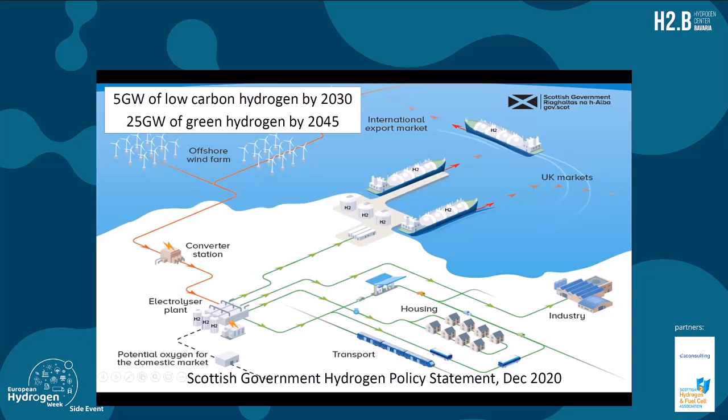So the policy background was set by the Scottish Government in December 2020, slightly later than the German hydrogen strategy, which came out, I believe, in June 2020. But it also has some very strong ambitions around the production capacity for green hydrogen: 5 gigawatts by 2030, scaling up to 25 gigawatts by 2045.

The big driver behind this all will be renewables, the capacity for production of renewables in Scotland. As people say quite often, Scotland has plenty of wind and plenty of rain, so we have a great wind and hydro resource. We do get some sunshine, and that will be playing a part in the future as well. But we believe that wind will be the dominant form of renewable generation in Scotland through to the 2040s.

Much of this will be offshore wind. We already have about 9 gigawatts of onshore wind, about 1 gigawatt of offshore. By 2030, we expect to see more than a doubling of onshore wind, and probably about an extra 11 to 12 gigawatts of offshore wind.

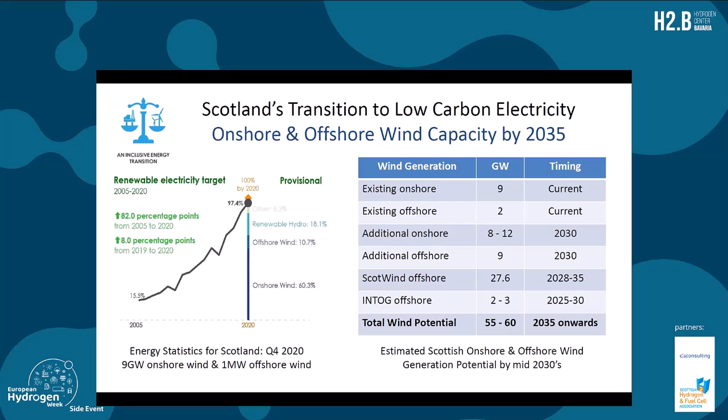And then starting to see some very substantial growth with the activities called ScotWind. You may hear this mentioned a few times during the event today. The Scottish Government is leasing areas of the seabed around Scotland, and the round that was completed this year identified 28 gigawatts of leases signed off for development of offshore wind.

Many of these projects are now looking at also using this renewable energy capacity for green hydrogen production, possibly for making ammonia or methanol or other similar power-to-X products.

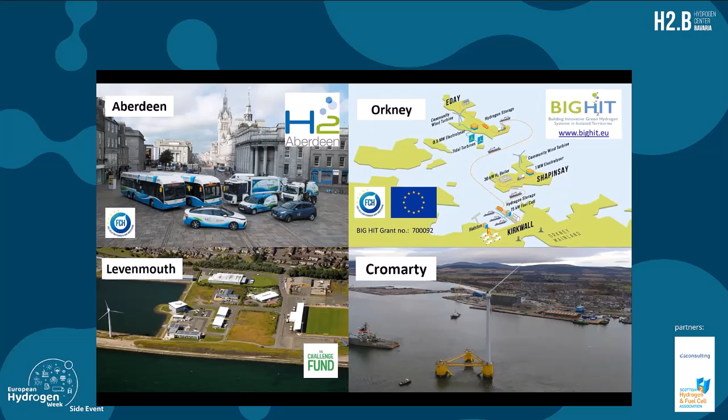That's coming through, but what I'd like to mention very quickly is some of the activities happening around Scotland already. So I'm going to take you on a quick tour around Scotland, starting just north of Edinburgh in a town called Methil, just across the river from Edinburgh, then move up to Aberdeen, Cromarty and Orkney, just to find out what's been happening.

In Methil, the picture you see here on the right, you can see that this is right by the sea. There is a big dock. That dock used to export coal. Methil was a big coal producing site. No more—that finished probably 30, 40 years ago.

Now the main activities around Methil are to do with, for example, the hydrogen office, which is the building, the triangular bit, the diagonal building you can see in the middle here, next to the dock, and also the links into renewable energy, for example, with wind and solar. Together, this has actually helped to develop a good understanding of the opportunity. Also, a lot of outreach in Methil with schools and colleges and the local population. And the picture you can see on the left here, there is now a large offshore wind turbine, just offshore.

It's about 100 meters from the shoreline, and this will be used to power an electrolyzer to produce green hydrogen. The hydrogen is going to go to about 300 households in the local area instead of using natural gas.

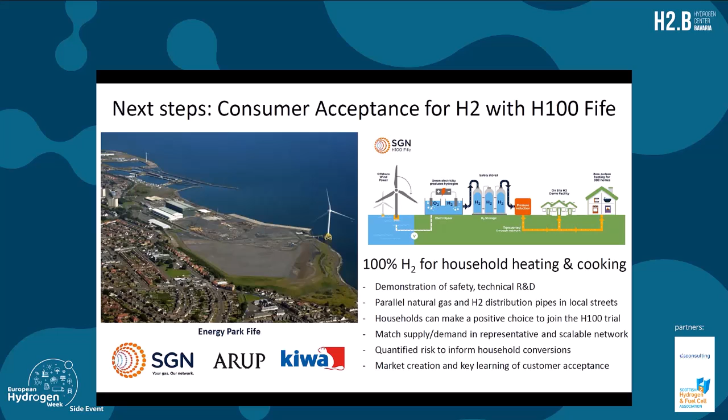So this is an opt-in trial. The householders will have a choice between natural gas or hydrogen. This is an important trial, both for building up the use of hydrogen for heat, but also stimulating some of the early demand for hydrogen. Within a couple of years, hopefully we'll be able to give you some updates around the experience for the households, the use of the hydrogen in domestic heating and cooking.

Moving slightly north, about 100 kilometres north of Methil, on the east coast of Scotland, Aberdeen used to be known as the oil and gas capital of UK, Europe, a big hub for oil and gas exploration, production and technical support, but now very much looking at energy transition.

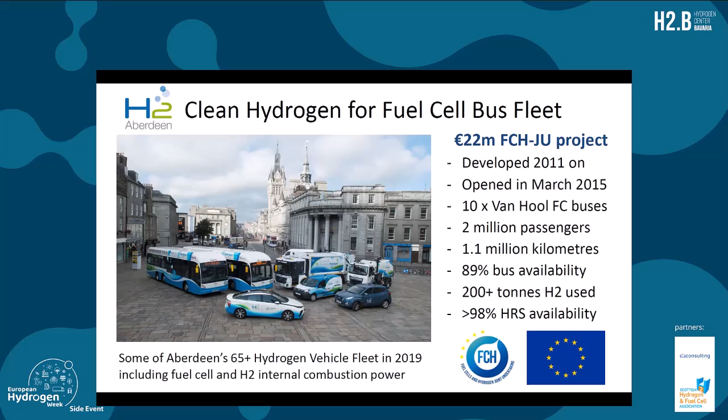One of the main activities that Aberdeen has been leading is around the deployment of hydrogen fuel cell buses in the city fleet, and again this is a European funded project. This has been supported by the Clean Hydrogen Partnership, opened in 2015 with 10 single-decker buses. It's carried over 2 million passengers. We now have a fleet of 15 double-decker buses running around Aberdeen, and it's been a great success in terms of the reliability of the refueling.

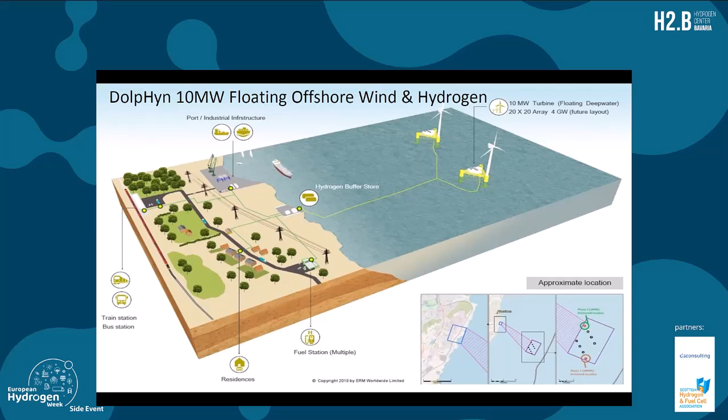This is important for deploying offshore wind into the deeper areas around Scotland, further away from the shore, where the cost of the pipelines could be much more approachable than the cost of doing it by direct electrification. And indeed, the bigger picture of the North Sea - there is a lot of experience and infrastructure from the oil and gas sector, pipelines, experience with working offshore, that will be important for the scaling up of green hydrogen using offshore wind.

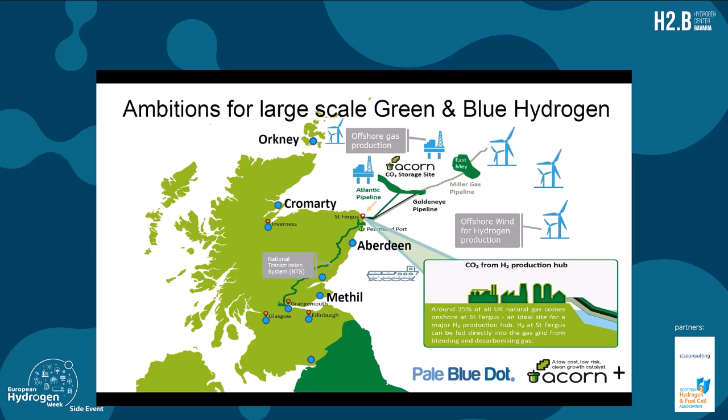On this map, you can just see, just up the coast from Aberdeen, a site called Cromarty, and that's our next stop to see what's happening with the development of green energy port hubs. You'll hear a lot more about this from our speakers later on, Joanne Alday of Port of Cromarty Firth, and Tim Dumenil of Storegga. So I won't spend too long on this one, just to say that Cromarty came onto our radar very recently, in 2020.

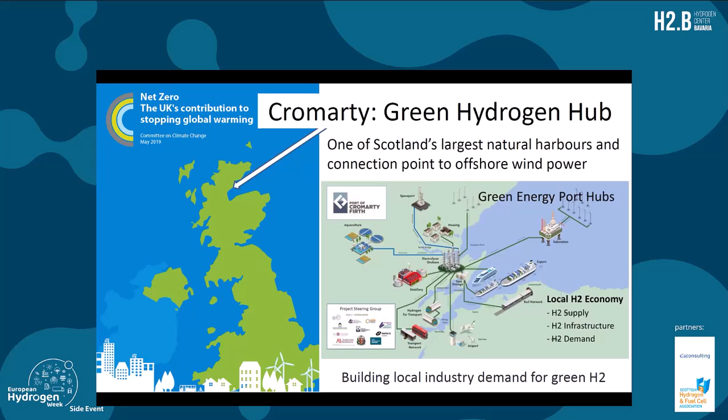This started to be looked at seriously by the Port of Cromarty Firth. A year later, they were actually signing agreements with Scottish Power for launching the North of Scotland Hydrogen Hub and electrolyzer capacity at Cromarty. The development of the concept for the green energy port hubs is bringing together the production, the demand, and the infrastructure that you can use to move the hydrogen around - some of it moving potentially down to Inverness, the city of Inverness about 30 kilometres away, and also the port for export into wider markets, including Europe.

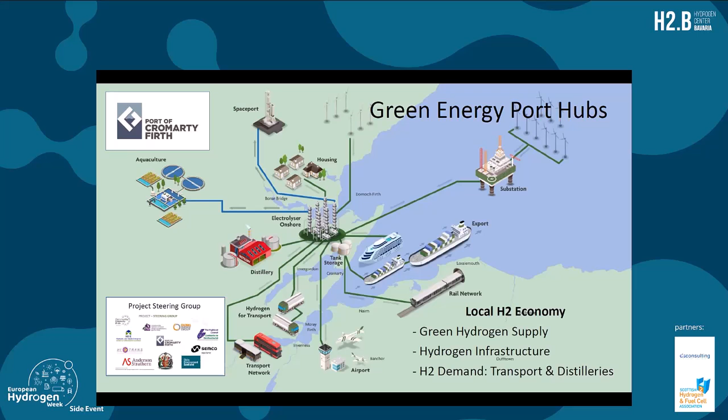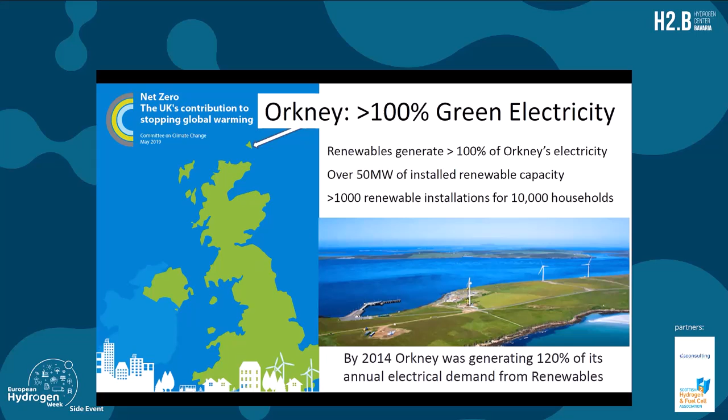Now moving up to Orkney, the Orkney Islands just off the northern tip of Scotland, about 25,000 people, very much at the leading edge of deploying renewables. By 2014, they're actually producing more renewable electricity on an annual basis than they were consuming. So very much a leading location. But that brought its challenges around the capacity and the constraints of putting more wind onto the electricity networks.

Again, with European support, there's been a number of projects taking part in Orkney. One of the projects that the Scottish Hydrogen and Fuel Cell Association was involved with was Big Hit. That started in 2016, and concluded earlier this year. That was about establishing hydrogen production on islands in Orkney, which can be used to take surplus renewable electricity, convert it to hydrogen, and then store it and transport it to other locations for different uses.

This has actually allowed us to get a lot of experience about production of hydrogen from renewables, and it's not always straightforward. You have to match the capacity of the electrolyzer with the availability of renewables very carefully, but also with moving it and using it between islands.

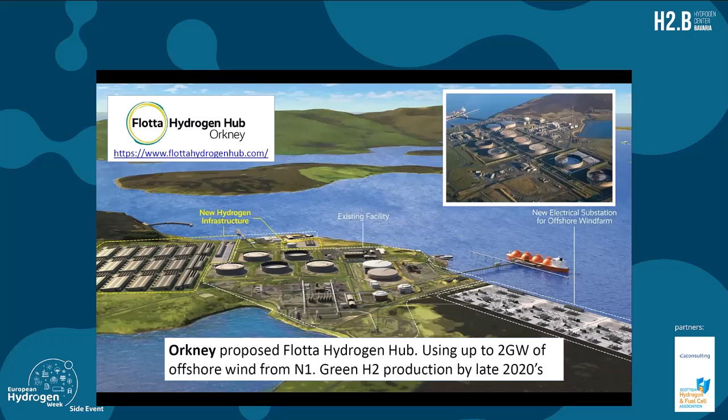Well, if we look at what's going to happen next in Orkney, as part of the ScotWind bids, there's actually a large bid in for areas to the east and west of Orkney, multiple gigawatts of wind capacity. And in Orkney, there is actually a location currently used for oil and gas, mainly oil, which could be repurposed to being a hydrogen or power-to-X hub for Orkney. So this is about not just looking at the small projects, but actually seeing them as a stepping stone towards much larger deployments. Orkney and Shetland are two locations.

The Western Isles could be very similar. So these are potentially, rather than having energy islands being created, we have islands already which are in good locations and can be repurposed from oil and gas to green energy, clean energy hubs for the future.

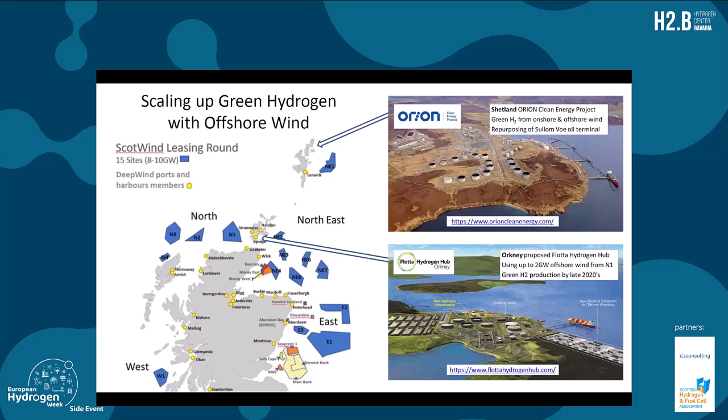And that matters because we can then see a pathway going forward towards starting to export that surplus capacity of energy, either as hydrogen or methanol or ammonia, into adjacent markets.

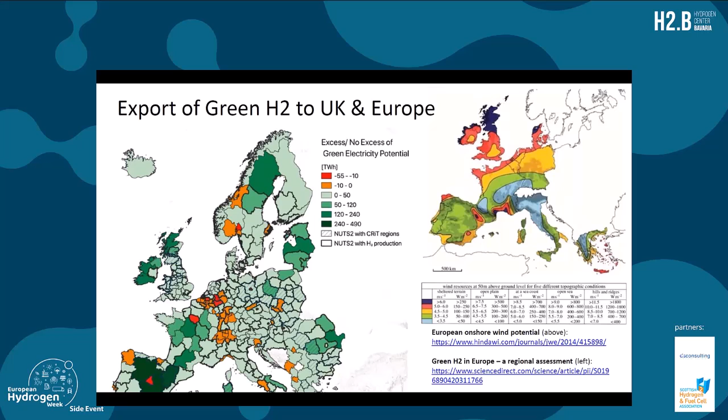So this picture shows very clearly the potential of renewable energy production across Europe. The areas that have a surplus are in green. The ones that are in deficit are shown in red or orange. And going forward, this can actually help us to supply the markets in Europe, adjacent markets where there is a demand for hydrogen and clean energy.

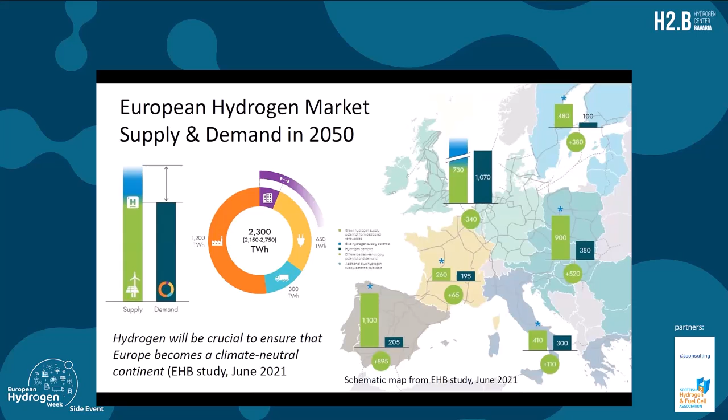This could be by shipping, or potentially going forward, it could be by pipeline. So pipelines connecting together different locations around Europe could then start to become a hydrogen backbone that allows us to move that energy efficiently and at the lowest possible cost between different locations at large scale.

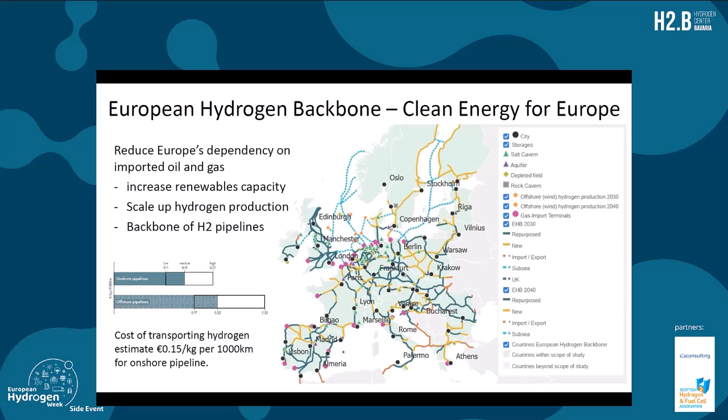So just to summarize, Scotland's got the targets for building up. We have the potential to start to actually produce. And this webinar is a good example of how we can then start to link together the activities between Scotland and Bavaria and start to make things happen on a practical level.

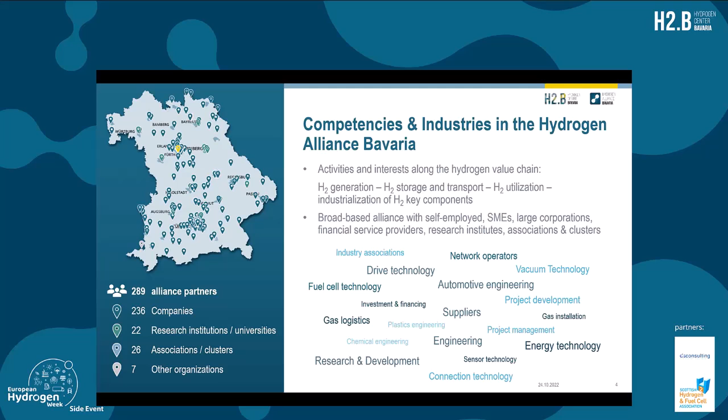Next, I would like to give you a short overview of the Bavarian hydrogen strategy and the strategy process. The strategy process started in May 2020 with the publication of our position paper. This was developed by the H2B and the Hydrogen Alliance, and this paper also served as a basis for the Bavarian hydrogen strategy, which was published at the same time.

At the end of April this year, we presented our Hydrogen Roadmap Bavaria, which outlines the next steps to ramp up the Bavarian hydrogen economy. I'd like to give you a bit more details regarding the content of the Bavarian hydrogen strategy and the Bavarian roadmap.

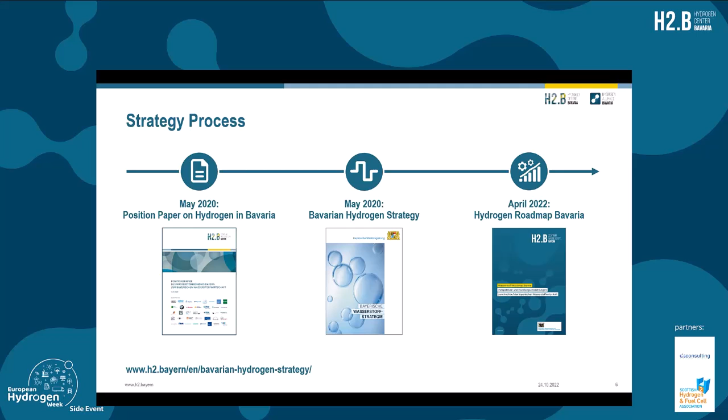The hydrogen strategy was published by the Bavarian Ministry of Economic Affairs, Regional Development and Energy, and puts a strong focus on green hydrogen and its use in mobility.

Since Bavaria has only limited resources or limited potential for renewable energy and the production of green hydrogen, at least when we compare it to other regions and countries in the world, the strategy supports hydrogen imports from other countries to Bavaria and technology exports from Bavaria.

For this purpose, various implementation steps have been defined. The most important or most interesting one might be the funding program for hydrogen refueling stations in order to promote hydrogen applications in transport. Another implementation step consists of the Hydrogen Roadmap Bavaria.

Here the goal was to define concrete milestones on the way to a hydrogen economy and to show perspectives and recommendations for action. Furthermore, the roadmap aims to estimate the possible hydrogen demand for the next few years.

It is important to note that the war in Ukraine and the energy policy consequences have not been included in the paper, as the writing had already been completed at that time. So the demand forecast that we made really should be seen as a minimum, and we expect an increasing importance of hydrogen imports in the medium term.

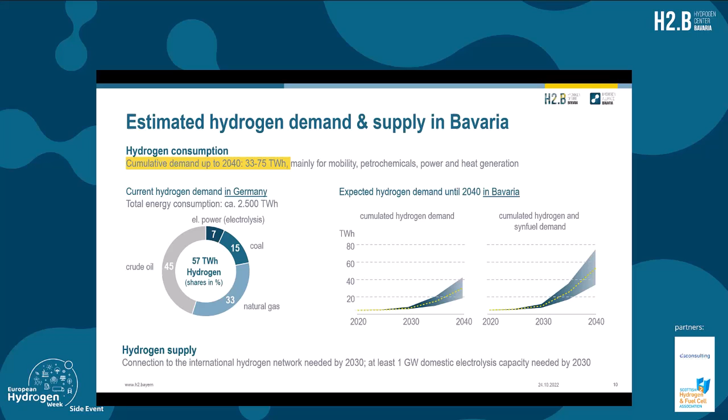As you're all familiar with, there are different forms available of hydrogen. Hydrogen could either be in a liquid state, in a gaseous state, chemically bound, or we could use derivatives. And depending on the form, there are different transport methods applicable.

For Germany, we seek to get early access to the European hydrogen backbone. Currently, there are 5 possible import corridors that are really important to us. Regarding Scotland and Bavaria, the North Sea corridor is the most important one. In order to ramp up the projects between Bavaria and Scotland, we have organized this event to give you an insight on the 2 markets and the current activities.

You've heard quite a lot about Scotland, and just to summarise, you see the map on the left. That is a combination of the onshore hydrogen hubs that have been identified as potential hubs by the Scottish Government. And you see, as you've already seen, the offshore wind potential. So the point I'm making here is the Scot2Ger project, a simple proposition about the export of green hydrogen produced from onshore wind prior to 2030 to Germany, to be followed up by production of green hydrogen from offshore wind.

Fundamentally, before 2030, we expect to have 20 gigawatts of onshore wind installed, with quite a piece of that available for hydrogen production. Then we have offshore wind following 2030 with a likely installed capacity of around 40 gigawatts, and maybe half of that, perhaps more, available for hydrogen production, meeting local demand, and also for export.

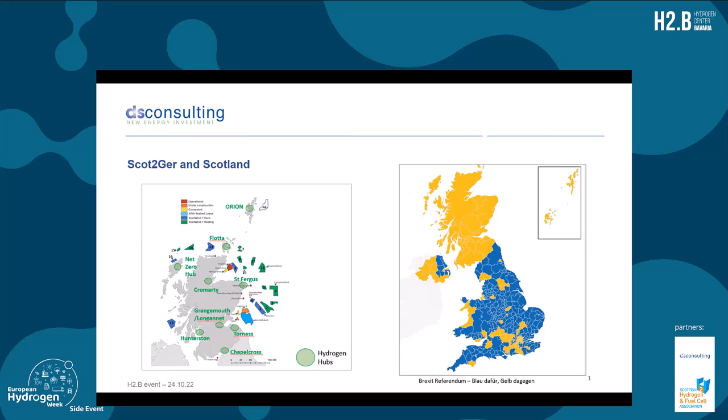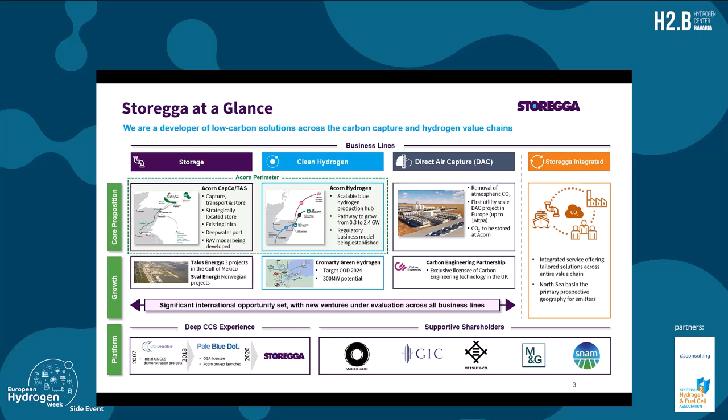And finally, we have Storegga Integrated, which is a full chain carbon management service to help large emitters find routes to sequestration. Storegga and our Acorn partners are leading the Scottish Industrial Decarbonisation Programme, which aims to capture and sequester a quarter of Scotland's carbon emissions by 2030.

So first of all, we need to understand a little bit about some of those carbon emissions. Prior to joining Pale Blue Dot, now Storegga, I was a senior manager with Diageo and heavily involved in energy minimisation and carbon neutral activity within the Scotch whisky sector. Whilst the Scottish whisky sector is a relatively small percentage of overall Scottish energy demand, it does, within certain regions, such as Cromarty, represent the majority of the fossil fuel demand within that local region through their fuel usage for steam generation and heavy goods vehicle logistics, as outlined in this pathway to net zero produced by the Scotch Whisky Association by Ricardo.

And as outlined within this pathway to net zero, hydrogen forms a significant percentage of the sector's transition plans. Energy efficiency through process improvement and the integration of electrical high temperature heat pumps, so industrial heat pumps, will reduce the amount of primary energy that is needed by the sector going forward, and therefore reduce the fuel switching requirements from electrification, bioenergy, and hydrogen.

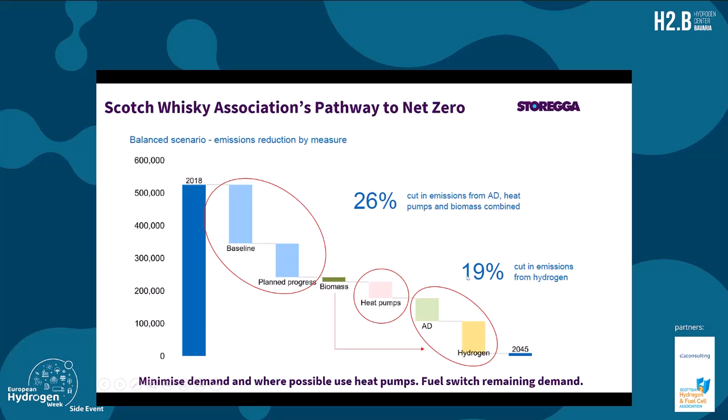Whilst it could be assumed that most industrial heat demand could follow a similar waterfall, this is unlikely to be the case given the inability to secure the very large electrical connections needed to replace industrial steam boiler capacity, the lack of waste heat recovery opportunity equivalent to the distillery condensers output, and the lack of suitable co-product for anaerobic digestion. So in some regions, we'll see hydrogen forming a larger part of that industrial demand. Storegga has provided input into that Scotch Whisky Association pathway to net zero, as the team have been supporting energy transition for the brewing and distilling sector for nearly 10 years.

So we've delivered a number of energy minimization projects and activities for the sector. We created a concept called Green Stills, which was an innovation looking to integrate both into new build and retrofit into existing distilleries high temperature heat pumps to reduce the primary energy usage of distilling by about 50 to 60%.

And we've led and created both the Acorn hydrogen projects and Cromarty hydrogen projects, which form part of the North of Scotland hydrogen programme. The latter will enable the distillers and others to secure security of supply for the hydrogen that they're looking to drive their industrial process with going forward.

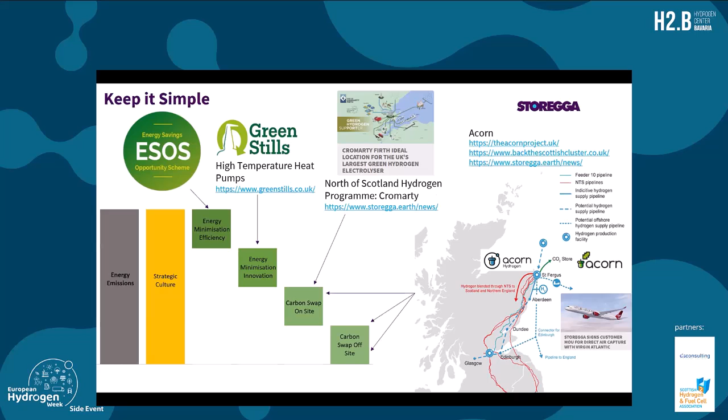So Cromarty hydrogen. In early 2020, Storegga started Cromarty Hydrogen, and in the first half of 2021, we delivered the feasibility study involving Scottish Power and the Port of Cromarty Firth. And in that feasibility study, we created a 4-phase vision for a build out starting at somewhere between 25 and 50 megawatts and building out to a regional solution of about 300 megawatts of electrolysis.

Scottish Power and Storegga are jointly now developing phase 1. We've done quite a bit of work over the last 12 months, and we're now looking at about 30 megawatts of electrolysis for phase 1. It'll be at Scottish Power's Beinn Tharsuinn onshore wind farm. Together we've customer memorandums of understanding in place with several off-takers, mainly distillers, for that project. The project seeks to take its final investment decision in August next year, and to commence operation in mid to late 2025.

With all of our hydrogen produced directly retailed to the end users and distributed by tube trailers to enable either a blend of hydrogen into the end user sites, or in several cases enabling the end user to switch to 100% hydrogen from their existing fossil fuel usage.

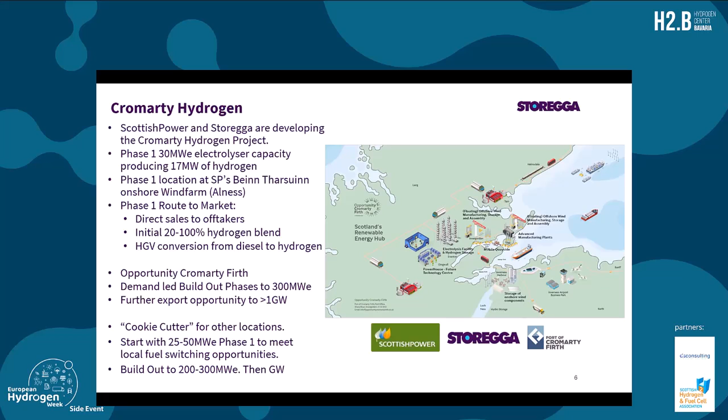The important piece about this is that you have to start with the right-sized phase 1 project, establish that foundational module of hydrogen, and then use that to build out this sort of regional hydrogen hub. A key piece of that regional hydrogen hub is then looking at the infrastructure to distribute the hydrogen.

So a couple of quick points on the route to market. At the moment within the UK, there is a gas safety management regulation that currently does not enable hydrogen to be moved within the existing natural gas pipeline network.

There's a cross-party working group that have been working on this for several years now, looking to make a decision by the end of 2023 about enabling a 20% blend of hydrogen into the gas network. But it'll then need a heat policy to come into place in about 2026 before any wide-scale adoption of gas blending or hydrogen blending into the gas network can come into place.

So for Cromarty Hydrogen, the phase 1 and phase 2 of the project, the route to market is going to be tube trailer. Whilst it's more efficient and cost effective to distribute via pipeline, the current regulation and policy doesn't enable that, and hence the initial route to market is through low emission fueled tube trailers delivering compressed hydrogen into the customer sites.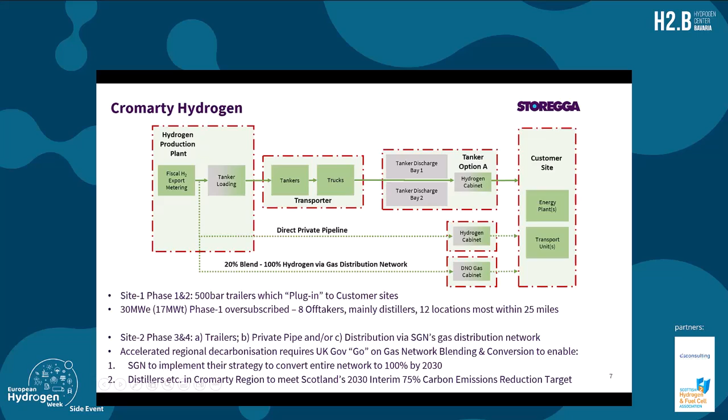We have to then look at this from an end user perspective, from the industrial customer, and this is how Cromarty Hydrogen started. We were having various conversations and discussions with the distillers, with the distilling sector across the north of Scotland, talking to them about the energy trilemma and energy transition.

So this energy trilemma is the security of supply, the cost, and carbon emissions. And so, what is the value proposition for hydrogen for industrial use?

When we've spoken to customers specific to this energy trilemma, their sustainability director will say, well, I need to meet my net zero target for my ESG reporting. Whereas the procurement director will say, well, I need the lowest energy cost to underpin my industrial operation going forward, whether that's for feedstock, heavy heat, or heavy transport requirements. But also that procurement director is going to be focused on the predictability and security of energy cost, which we've really seen play out in the international domain just in the past 6 months in terms of energy security and cost security around natural gas in particular.

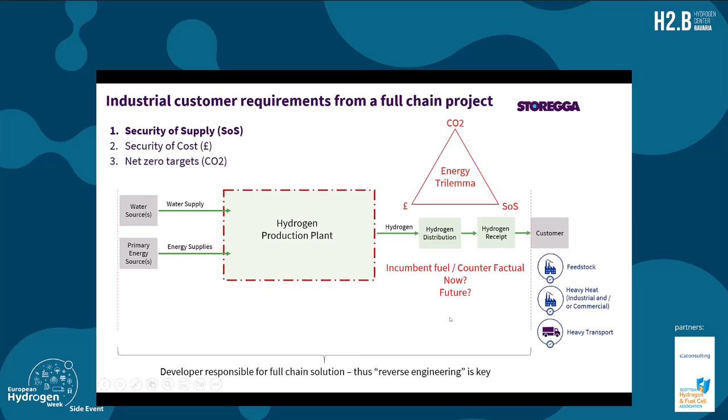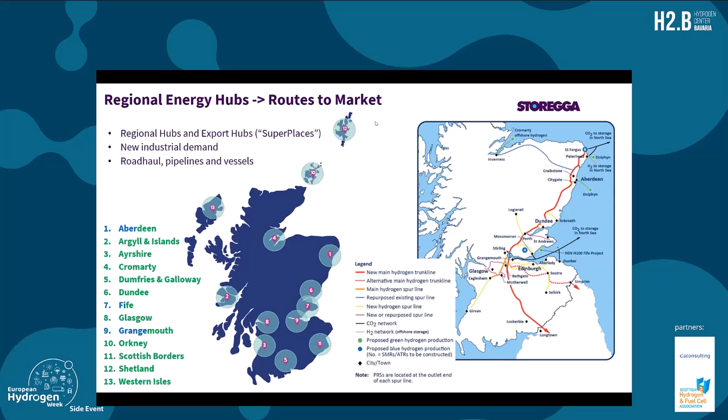Thanks, Tim. I will just share my screen. Guten Tag, everyone, I hope you're having a good day. I'm honoured to be here to talk to you today. I have a particular love for Germany and have spent time in both Bayern and Baden-Württemberg and really enjoyed being in both. So, as I say, delighted to be with you today and happy to talk you through our hydrogen hub in a little bit more detail.

As Tim has introduced, I have been facilitating the North of Scotland Hydrogen Hub, centred around the Port of Cromarty Firth. You can see the port here on the right-hand side. Just to give you an idea of size and scale, you can probably see the pickup truck here. These are the towers for the Moray East offshore wind farm, and this is the 2 megawatt demonstrator from the Kincardine floating wind farm. In the background you'll see the oil rigs that we store as well, so we're used to dealing with very large bits of kit in the Cromarty Firth. We're also going to have a huge amount of wind industry happening here and in and around our region, which is really what places us at the centre of the hydrogen sector as well.

So in terms of why Cromarty Firth, this is a map of the ScotWind projects that were announced before clearing. We now have 28 gigawatts that has been awarded in Scotland, and we are really at the centre of those sites.

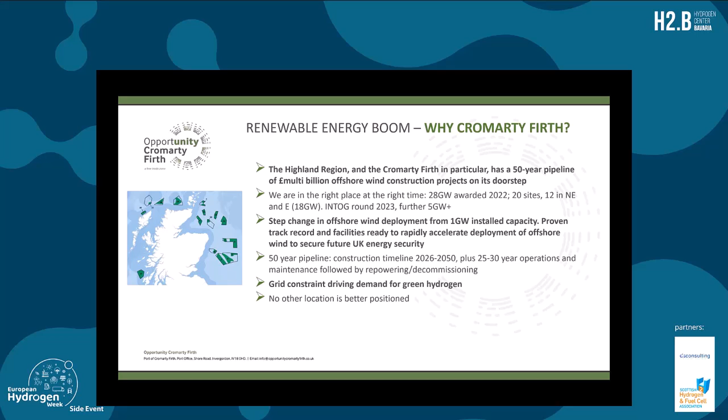It is a step change in delivery of offshore wind in Scotland. But importantly, it makes us a central place for that wind electricity to come into, and then be converted into hydrogen. One of the things driving that for our region is the grid constraint issues. In the Highlands of Scotland, we have more people putting into the grid than taking out of it, so we're one of the most expensive places in the country for offshore wind developers to connect into the grid. So a number of them, with the capacity about to be built out, are actively pursuing alternatives, and hydrogen is one of the prime alternatives for them.

So in terms of our ambition, this is our master plan - these are all live conversations taking place. As Tim alluded to, we established the North of Scotland Hydrogen Working Group about 2 years ago now, and started trying to quantify the demand across the region, because we knew anybody wanting to build a project would need to know who's going to buy the hydrogen to begin with. We always hoped export would be a very large industry for us in time, but we need that regional demand first to get these projects up and running. So we very much took a regional approach to this.

And as I say, all of the conversations you can see here are real life conversations, so I'll pick out a couple. Rail is an interesting one - we are very likely to have hydrogen powered rail to the north and west of us, because it doesn't make commercial sense to electrify those lines. They're in very remote areas. So it's highly likely that one of the first trials in the UK of hydrogen trains will be to the north of where I'm sitting today.

As Tim mentioned, the gas grid as well - the northern extent of the gas grid is Invergordon, where our port is based. The gas grid was put in to service the distillery, and we also had an aluminium smelter in the town up until the 1970s. So the gas grid was put in to service industry here, but does not go any further north. So any businesses, properties and households further north cannot access that gas grid and have to rely usually on oil and electricity. So there's a real driver by the Highland Council to become a hydrogen-based region, because they believe that's going to be more cost effective in the future for householders, schools and businesses, and also give people an alternative to some of the electricity provision.

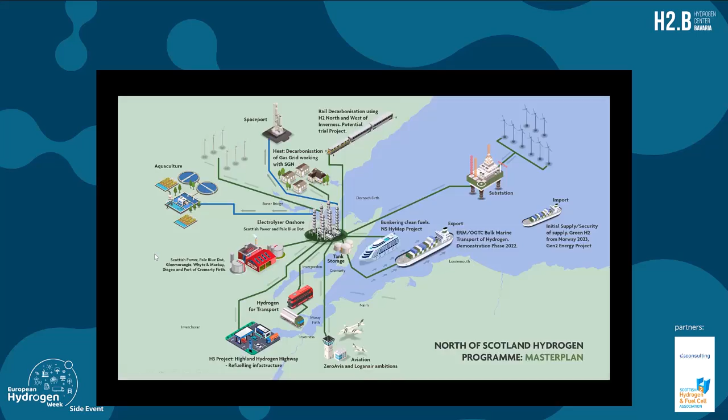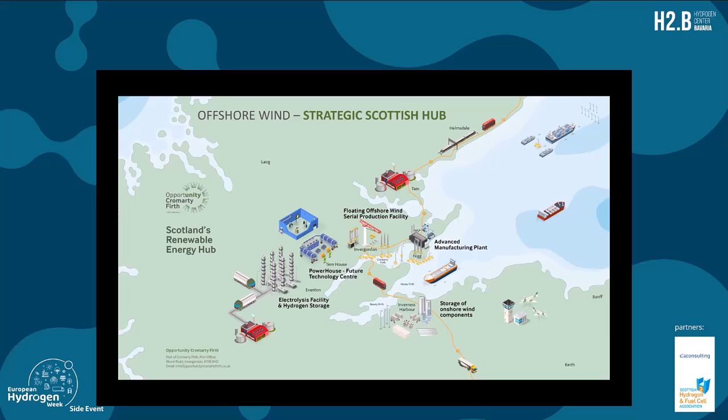So we're crossing our fingers. Some of you will have been watching our politics of late, I'm sure, with your heads in your hands - so have we. I'm hopeful that in the next week we might have some sort of stability moving forward, and that they may then be able to make the announcements and let us know who's won that competition. But I hope that's been a good overview for you, and I will welcome your questions later on. Thanks very much.

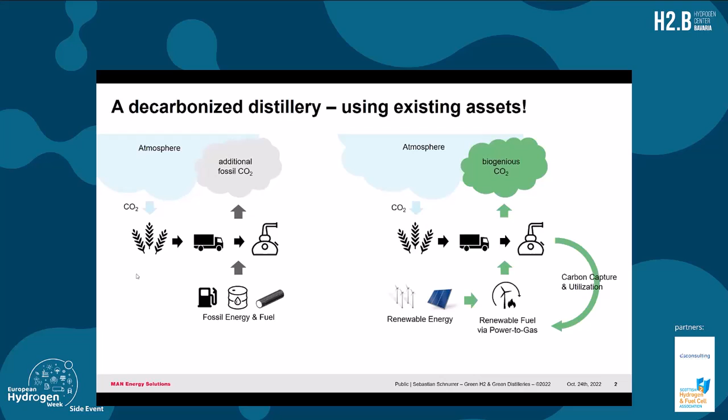Now on the right-hand side, if we switch to renewable energy and create renewable fuels via the power-to-gas process, there's the opportunity for carbon capture utilization, closing the carbon loop, so you'd have no fossil but biogenic CO2 emissions only, coming from the feedstock. So on the left-hand side, traditional business with fossil CO2 emissions; on the right-hand side, net zero CO2 emissions and a closed carbon loop.

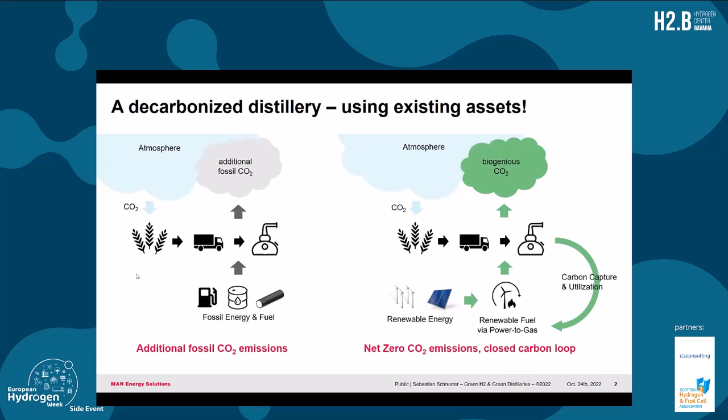Now let's take a closer look at the right-hand side concept. Let's start again with the feedstock, which releases CO2 from the fermentation process. Then we add renewable energy. For this case study, we applied our power-to-gas system, which comprises PEM electrolysis and then further conversion of the hydrogen together with CO2 to synthetic natural gas, basically synthetic methane, SNG, on the right side. This process already produces steam that can be used directly for the distillery's steam demand. And then comes the big advantage.

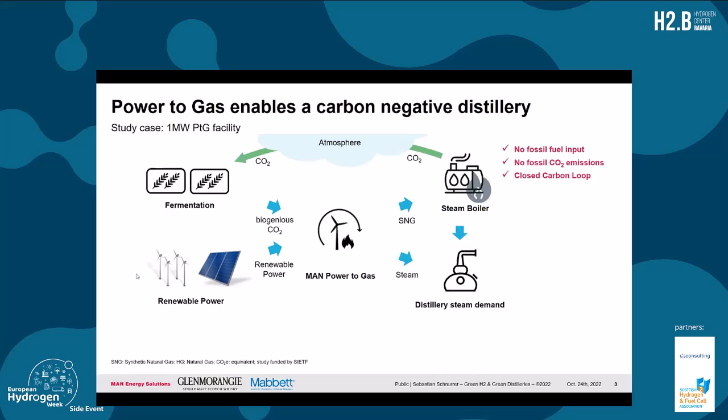Why do we convert the hydrogen in the first place? Because we can use existing infrastructure - steam boilers, gas lines, storage, everything already on site. Then the CO2 from that is released as green biogenic CO2 into the atmosphere, and the loop is closed. So again, there's no fossil fuel input, and the result is no fossil CO2 emissions, and we have closed the carbon loop.

Now why do we call that a carbon negative distillery? It's fairly simple: if we use all the CO2 available from this fermentation process, we can actually produce more fuel than is required on this site. So we could use it for heating homes, providing fuel to industry, local transport, or even trucking the whiskey from A to B. All infrastructure available for natural gas today can take up this synthetic methane and save CO2 there too. That's how we go from a traditional distillery with additional fuel and fossil CO2 emissions to a really negative distillery. We summed that up here.

This power-to-gas process really enables net zero and creates an all-new revenue stream. Again, the basic advantage here is that you can use existing infrastructure, the existing assets. So that was a quick look at the carbon negative distillery project, and we're very curious to see how that continues its development. That was a study for one site of the Glenmorangie distillery, as you can see here. We're curious to see, and happy to support, further development. It's also quite nice to see what's happening at Port of Cromarty.

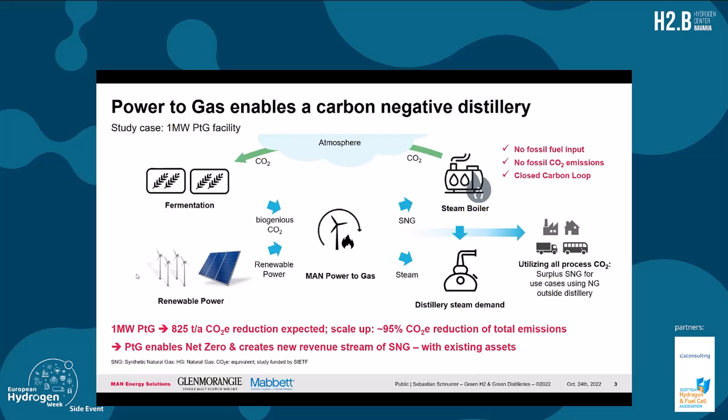Now, jumping to the next topic of my presentation, how to transport hydrogen. In this case, we're speaking of Scottish-Bavarian partnerships, hopefully transporting hydrogen to Germany. Why would you do that in the first place? We saw before there are areas that have surplus renewable energy, and others that don't and need energy. Germany has always been a net importer of energy, and projections show this isn't going to change just because we change the energy form we're importing.

So Germany needs large green hydrogen imports. Even if we target 10 gigawatts of inland electrolysis capacity by 2030, that's not enough at all. Estimations range from 1 to 3 million tons of hydrogen per year that need to be imported from somewhere. So why not from Scotland? But there are questions to that. One was already asked in the chat: how do we transport hydrogen in a sensible way, and how can we do that by 2030 with more or less existing technology? And how do we solve this chicken-and-egg problem for a market ramp up?

When talking about ship transport, every ship owner will start laughing at you if you come with a 1 megawatt electrolyzer and say, can I book some capacity on your ship? We're talking about large quantities. So how do you find off-takers for large quantities of green hydrogen? They need some build-up time as well.

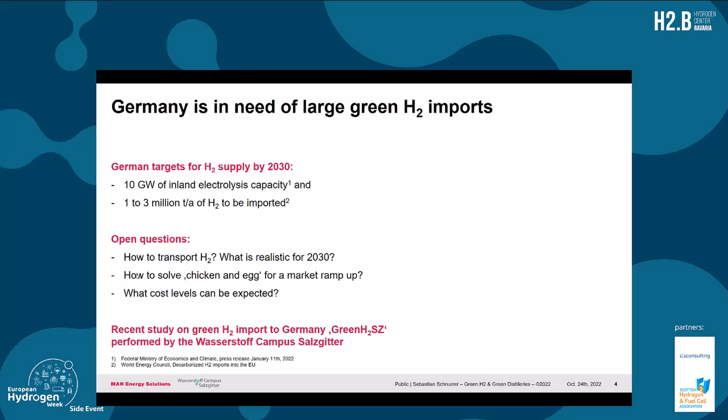And what's always interesting, what cost levels can be expected for such green hydrogen transports? So there has been a study released recently from a project in Germany called Green Hydrogen for Salzgitter. For those of you who don't know Salzgitter, that's a city near Hanover in the medium-northern part of Germany. This was done within what we call the Wasserstoff Campus Salzgitter, in English the Hydrogen Campus of Salzgitter.

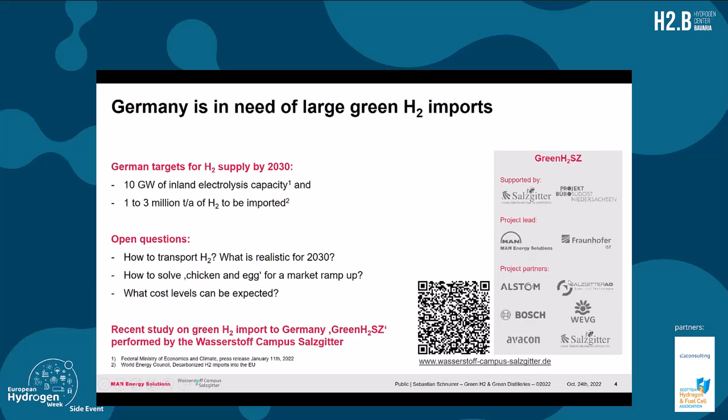On the right-hand side, you see all those companies who are involved there, ranging from a company that builds rails and a large steel producer over to Bosch, which everyone should know, and local energy suppliers. The city of Salzgitter participated, and we from MAN had the honors together with the Fraunhofer Institute to lead that study.

Now we have some hydrogen carriers that contain carbon molecules, which means you need a carbon source, for example CO2, to convert hydrogen into those carriers. So what we have planned here is during the reconversion to hydrogen, we capture this CO2, liquefy it, and bring it back to the place of origin, wherever the green power is available at a cheap price.

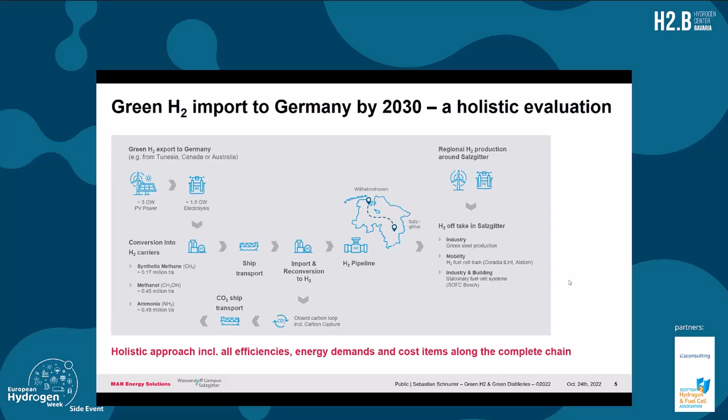What distinguishes this study from many of those studies that have been published in recent months and years is we have really tried to include every efficiency, every energy demand, every cost item along this complete chain. And we are not looking into the far ahead future like 2050, so what could be done in an ideal world if I have 20 years from now to develop a new technology. We have instead been trying to look at 2030. So what is available until then? Where can we start actually?

Now coming back to the hydrogen carriers, a lot of discussion has been ongoing and still is ongoing about which one of those carriers is the ideal or best one to carry hydrogen around the world. And I have to say, we realized pretty quickly it's much more than just technology and cost. So you see the whole chain again from the left: power, electrolysis, conversion, shipping, reconversion, and so on. And you have the 5 major hydrogen carriers in discussion, which are methanol, ammonia, synthetic methane, liquefied hydrogen, and a carrier media, LOHC.

Now, I said it's more than technology and cost, and we tried to evaluate which of those carriers are available until 2030 in terms of: do we know how to build such facilities to produce those synthetic fuels or carriers, or are they still at lab scale? Do we know how to scale up? Have they been proven in an industrial environment? How about the infrastructure you require with this? And of course, what does it cost? And how about the efficiency? Another point that I think was part of one question: how about the handling? Is it safe to handle? Do we know how to handle such carriers?

And you see, we have tried to depict this in different colors. So green would mean, yeah, we know how to do this. There is a solid cost base available in public literature. This has been proven in an industrial environment. We know how to scale it. We know how to deal with that. So everything should be fine. Everyone from the Port of Cromarty project knows, well, that's only on first sight — you need much, much more work to do. But in general, everything should be fine.

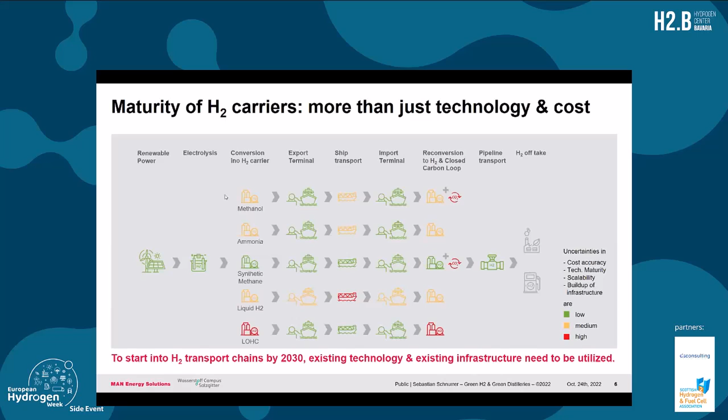Because of that, we have focused on the top 3 carriers: methanol, ammonia, and synthetic methane, because thinking in a technology range of 2030, those are the only ones that are really available. To start such hydrogen transport chains by then, we need to rely on mostly existing technology, and that's very important, and mostly existing infrastructure as well. Just think about how long it takes to build a pipeline or a new terminal. This is all time we don't have anymore. We need to start now.

Now to the most interesting slide, I think, for many of you: what's the cost result of that? I'll guide you through this from top down. What we've done here are bar charts with different colors. The first 2 bars are reference cost levels for producing hydrogen from onshore wind in Germany.

That's the first one, around the area of Salzgitter. There's no real transport required anymore, we are very close to the off-takers. You see that's about €4 per kilogram of hydrogen. To make sure this is understood correctly, these are all just production costs, no profit margins, nothing else incorporated, only production cost.

Then if we move a bit further north to the North Sea and produce hydrogen off the German coast, there's a bit of pipeline transport, but it's not that much, you can almost neglect it.

Now let's jump down to North Africa. In this case it's Tunisia we have chosen to represent Northern African PV generated hydrogen. You see the cost for hydrogen is much lower, well below €3 per kilogram. So it should be fine, right? Well, not completely, because you're still in Tunisia, not in the north of Germany or somewhere else where you have the demand.

And now the tricky part starts. You need to convert it. The last 3 bars show those pathways transporting the hydrogen via ammonia, via methanol, and via synthetic methane. Let's go through those colors.

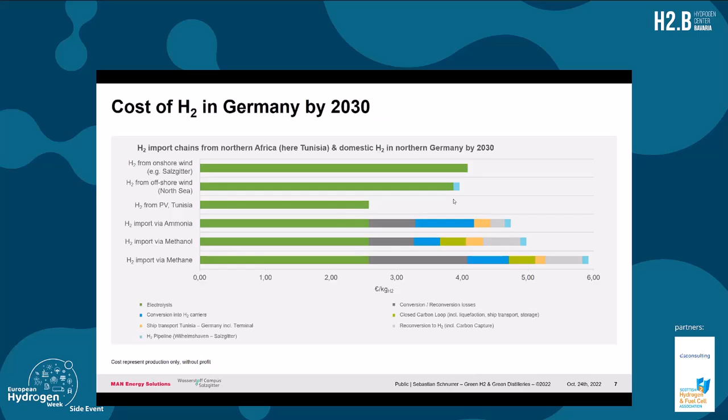So then maybe one last slide from my side. We've been speaking a lot of Cromarty and hearing many good info on progress there. I took the liberty to add one more bar that has not been published in our study. I just expanded our model a bit, and tried to put in values for how about if we produce hydrogen from offshore wind in the Port of Cromarty and ship that in the form of synthetic methane to Germany. Same case as before.

And you can see here, this hydrogen based on offshore wind in Scotland is competitive to PV-based hydrogen from Northern Africa by 2030.

If you can do the transport via pipeline, it's even better. So that's really should be a good sign for all the export efforts being done in the hydrogen hubs all around Scotland. And I'd like to close my presentation now with, if we want to start this, and I think it's not an if, but a when and how, we need to rely on existing technology and existing infrastructure.

Otherwise, we're just too slow. We have been wasting time already. Let's not do that again. Let's start with what we have today. So thanks very much, also looking forward to your questions.

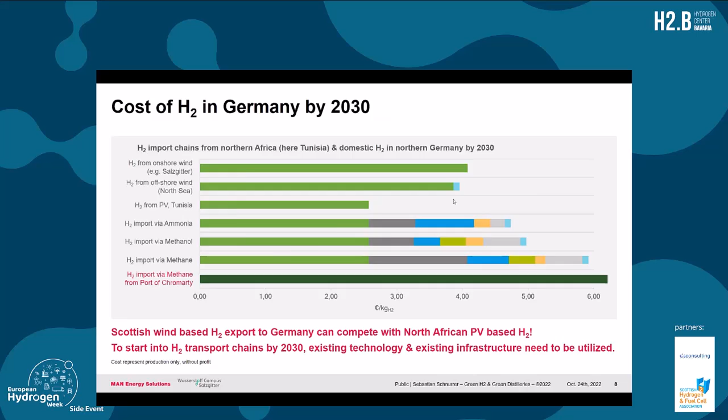Sebastian, thank you very much. And what we'll do now is get all of the speakers on the screen. Welcome back, and we've got a good number of questions coming in. Many of the questions touch on how you move the hydrogen from where you make it to where you use it. So it's very much a question of which carrier: liquid hydrogen, ammonia, pipeline hydrogen, methanol, synthetic methane. Lots and lots of different options.

I think maybe a question, let's start off with you, Tim. In terms of the work that you're doing, how do you see it, and if we can keep these nice and short, because we've got a few questions to get through. How do you see the different options for moving hydrogen from the Storegga perspective and from the point of view of the whisky distilleries? Yes, I think it's been touched on a bit through the presentations as well: if you can produce the hydrogen close to the point of use and distribute it through pipeline, it's the most cost-effective thing to do, and the most practical and safest route to go as well.